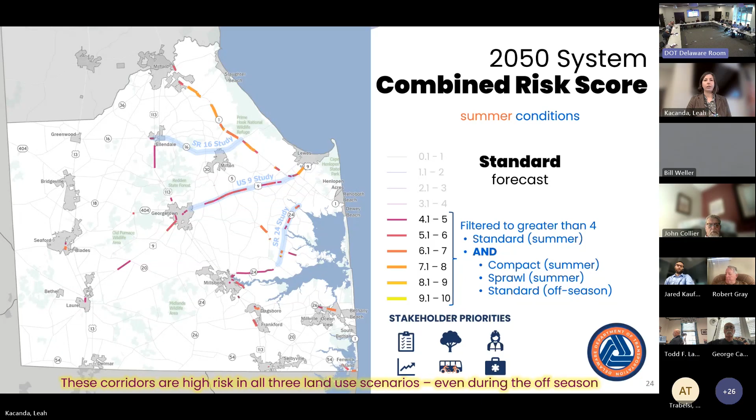So not just congestion. I know when I look at this map, I'm like, oh, that's where traffic is. It's not just congestion. That's just one of 6 measures. It's also the flooding piece, all those other priorities. So we also talked high level about potential solutions for what we can do to address all these risks.

Advancing projects and programs to improve roadway safety, and that is the top priority for the department. We want to increase available transportation options. If someone doesn't have to get in a car to get to their destination, that's one less car contributing to crash risk, contributing to traffic, etc.

We want to expand network connectivity and capacity where appropriate. So how can we better connect our developments and our communities and our neighborhoods with destinations? Having one way in and out of the development isn't a well-connected development, things like that.

We also want to continue our work with Sussex County as they advance the next comprehensive plan, which they intend to get started in 2026, right around the corner, and the land use reform working group recommendations. Our area municipalities, some of you are in the room, and I know a number of you are online, and Delaware Transit Corporation, DART, as well.

So Andrew is going to speak to some of what we heard from you all last time we met. Yeah, so at the last meeting, we had some poll questions, some opportunities for you all to directly engage in some questions that we posed to you. So the first one was, what word or words describe your vision for the regional transportation system? So we have a whole word cloud there. I'm not going to read all of those. You can kind of see what they are.

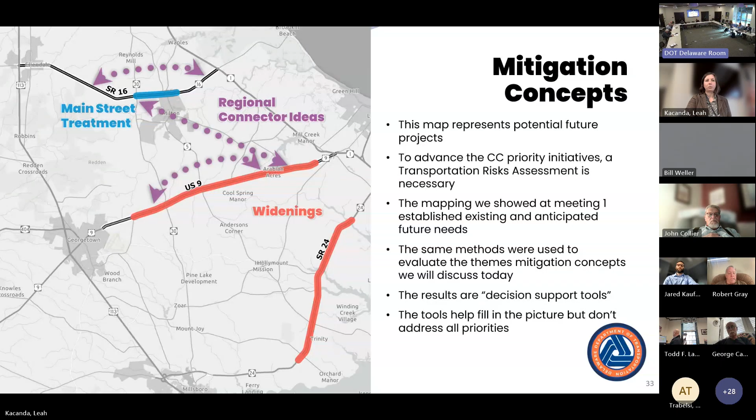And really, the results are informing the highlighted things on this slide. So we're not going to be able to answer questions in all of the potential solutions, but it will directly contribute to a number of them. With that, we are going to transition into our mitigation strategies.

And before we get into the weeds, I love that our presentation features a glossary, right? That's always a good sign. But we did want to make sure everyone understands what we're talking about when we use some of our jargon. So stakeholder priorities. We already spent some time talking about that. That one's pretty straightforward. It's what we heard from you all and your neighbors during our public engagement processes over the past 5+ years. And we use those priorities to guide our scoring methodology and our evaluation measures.

Now, when we say potential solutions, that's the universe of all those P's. It includes policy changes, program changes, partnerships, projects. It's a very broad term. However, when we talk about mitigation concepts, that's when we're talking more about potential infrastructure changes. So mitigation concepts are roadway widening, regional connectors, and main street. And you'll see today, we bundled these ideas into different strategies. We call them blue, red, and green. It's really going to be exciting to see what we came up with.

And for each of those strategies, we score them. So the same way we scored the existing network and the 2050 network last time we met, we will be applying the same criteria to these mitigation concepts to see how they score, because we want to know if they work or not, what they do solve, and how well they potentially work to address the priorities you all have. So again, it all ties back to this chart. The scoring is the same kind of set of criteria.

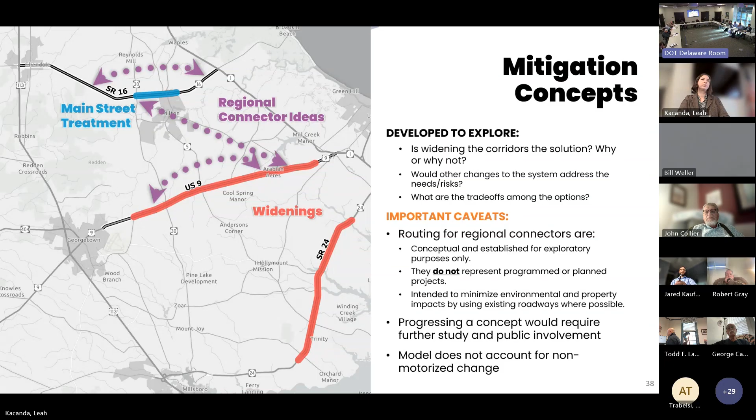See, I can see, for instance, if you knew ahead of time or had a concept ahead of time of the amount of traffic that is traveling, let's say westbound on Route 9, how much of that traffic is going up to Milton, then you can figure out the amount of density that benefits on the rest of Route 9 as it goes west, for instance. It's a really, really good point, and I encourage you to keep all of these ideas in mind as we move forward.

So our lines on the map here, if I could walk you all through the specific ideas we came up with. First and foremost, in blue at the top there, that Main Street treatment in Milton. No surprises there about where that's located or its limits. A lot of meetings have been had about that idea already. And what we wanted to do is make sure that if we do create a more bike and pedestrian friendly environment there, that we're not creating a new problem, a new traffic snarl. So the model helps us make sure that we're not creating a bigger problem than we can solve.

So for that reason, we also wanted to explore some potential connectors in the vicinity. So perhaps less through traffic would choose to drive through what will be more of a downtown environment on 16 through Milton. They could go around on those two northern routes. One of them is a little bit longer, one a little bit shorter. Both are designed to kind of get through traffic around town.

We also show there a southern connector that is labeled 16/9 connector. And that kind of diagonal route reflects something we learned in phase 1 of the study, which is that a lot of the traffic originating towards Ellendale coming in on 16, their end destination is to the southeast down towards the beaches. So a lot of folks right now are already turning right onto 30 to head south and wiggle their way over via a variety of roads towards Lewes and Five Points. So that kind of diagonal gives a little bit of benefit potentially to both 9 and 16.

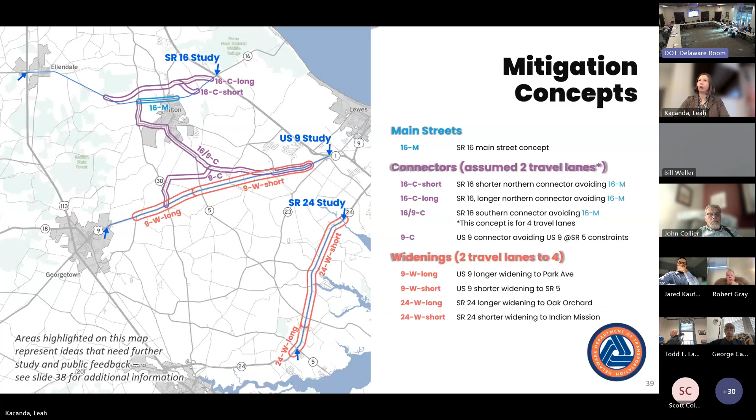One of the other pieces of this is wanting more options and resilient options, such that if one road is totally congested, folks have another outlet. Some of those kind of redundancy principles, which would not be reflected by limited access. But we'll definitely note that, and our team can take a little bit of a deeper look for you. All right, thank you. Okay.

All right. So when we talked about our glossary, I alluded to this. So obviously, we saw quite a number of options, and again, limited resources. I don't think we can build them all, especially when the widenings and the connectors are attempting to address some of the same problems. So what we did was group some of these mitigation concepts into 3 different strategies. Just gave them arbitrary labels of blue, red, and green.

Again, we're not saying that one of these strategies as a whole is going to progress. It's just a tool for evaluation. So again, similarly to our caveat about not a programmed or funded project at all, this package is also not a definitive direction. It just gives us a little bit of a tool to explore things.

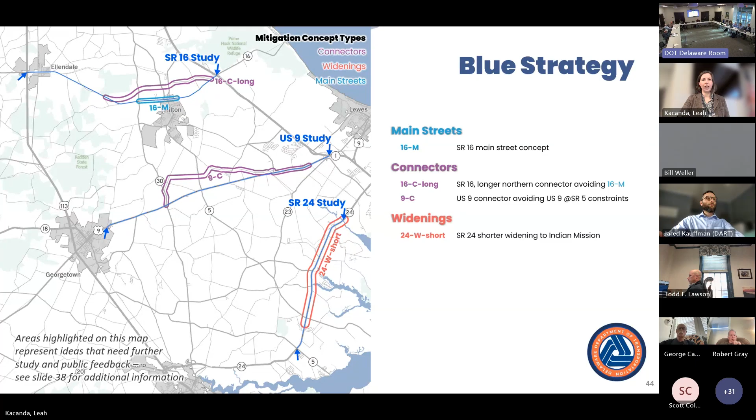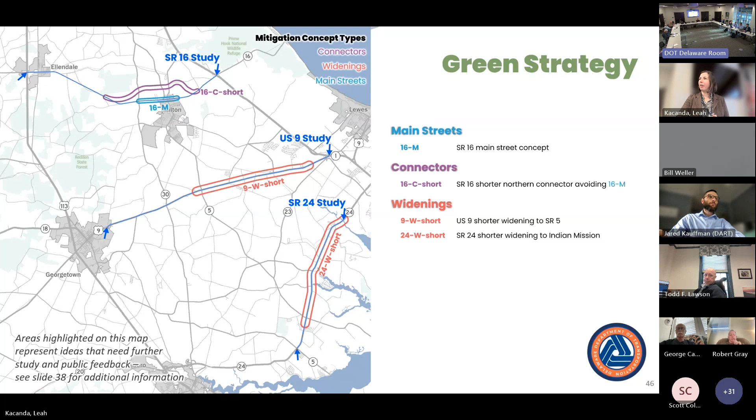And you'll see there on the map that caveat we talked about earlier. Just want to clarify again, these are not funded projects. We're just evaluating. So again, the blue, red, and green. So now we need to understand how they all perform. So for that, I'm going to ask my colleague Ben to join us and walk us through even more maps than last time, I think.

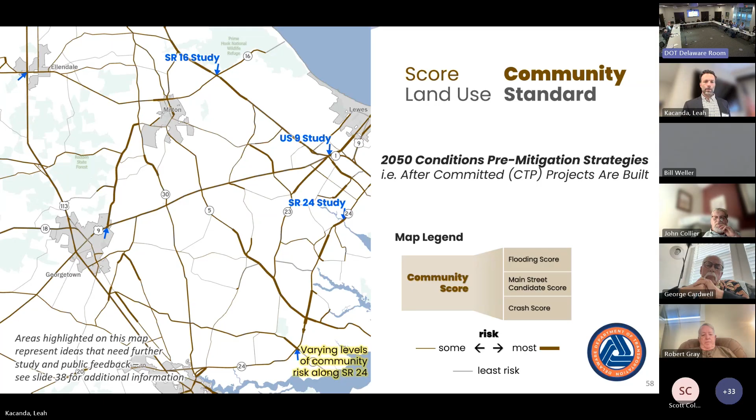We also have just sort of a mid-level, I'd say, across 9 through the study area of risk level on the community front. And then varying levels, sometimes pretty high, sometimes pretty low along the 24. Then when we look at modeling what implementation of these strategies looks like, we're starting with the blue. So again, it's got the Main Street, the couple different connectors, and the shorter widening on 24.

And I'll just point out again, kind of going through the same sequence. We don't see that thick line anymore on 16. So that Main Street treatment is doing its job and decreasing the community risk there. We have on 9 pretty much no change, still that sort of smooth mid-level risk amount. I'll just say on 24 that we don't really see much change at all there either.

Oh, sorry. In this comment too, I'm pointing out the fact that on 9C, you can see a risk level there. It's not huge, but we are actually adding risk where there wasn't risk before by adding a new facility that we're encouraging people to go to. And you could say the same for the 16C long up top. Community risk added, and not much decreasing along the corridors except for that Main Street treatment.

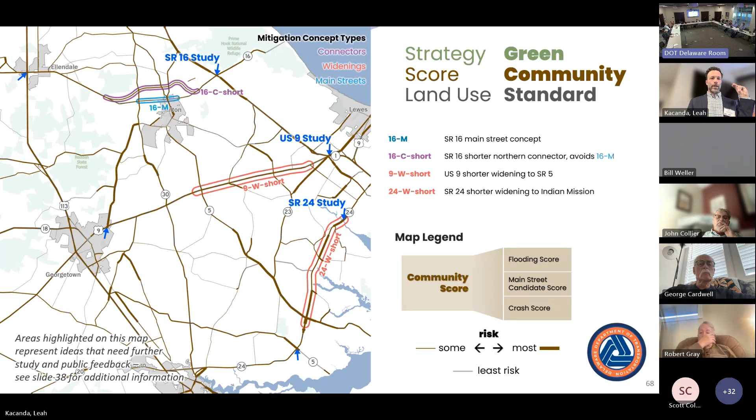Moving into the green, where we've got the shorter northern connector for 16, short widening for 9, and short widening for 24. Here, the effective Main Street concept, no real change on the 9 corridor. We introduced some risk on that northern 16C short route, and we have a little change on the 24 route.

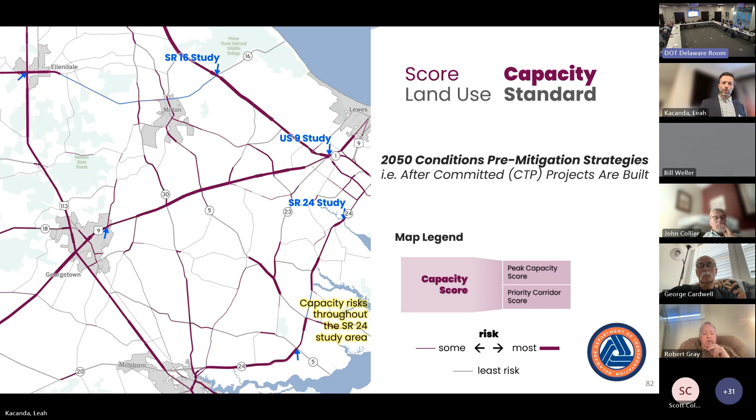Along 9, we certainly have some thicker lines pretty consistently through, starting on the east side where that CTP project widening ends, and then carrying all the way to Park Avenue and maybe finishing a little bit there. The 24 corridor is kind of similar to the community score, highs and lows, but throughout the corridor.

And then applying that blue strategy with these various different concepts for mitigation, we see some improvements to these different corridors on the capacity score. So 16 doesn't change much. A few of the thicker lines on 9 have diminished, and we're getting some capacity issues on the new connector. So again, sort of introducing risk where it wasn't before, but that could be something that you could even explore going from 2 lanes to 4 lanes, like we did on the diagonal one. But we're seeing that it does pull capacity concerns from 9 to some extent.

And I'll just say too, and this gets to Dick's comment or question before, is that even on facilities that we're not directly talking about, like 9 or these connector routes, leading to this connector route we see on 30, this section gets wider for capacity concerns, because now that this is an attractive route, people that took a different route before may be heading toward or out of that connector route on 30 and creating capacity risk that was smaller before in certain spots. So it's a little bit of that whack-a-mole effect.

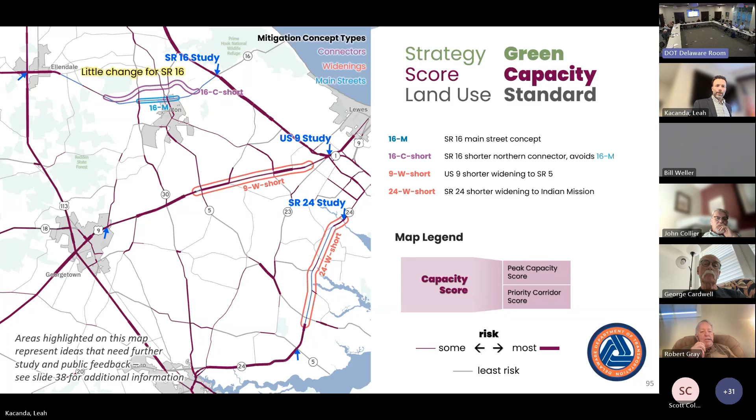And then green, this is more focused on the 2 widenings on the 2 lower routes. 16 doesn't change. Again, this is the one that reduces risk on 9 the most, the widening of 9. And we don't have the increase that those connector strategies introduced. And finally, the widening on 24 is effective.

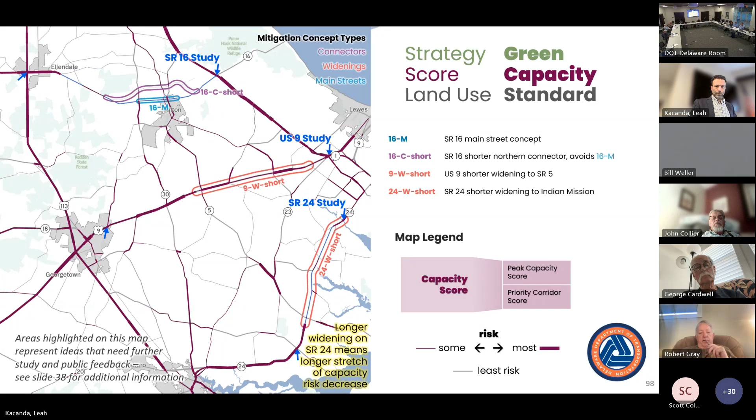So again, green and blue are showing some promise as strategies for capacity risk reduction. We've got the Main Street is effective, it's not increasing capacity risks, so that's good. And I will say that we did once do a preliminary run on 16 without any connector routes that would take through traffic around it, and that maybe worsened a little bit on the capacity end, but not very significantly at all. Yeah, so essentially you would not have to pair the Main Street improvements on 16 with a parallel route. From a resource perspective, good news. Yes. And potentially community risk, I think, would be lessened by not going that route.

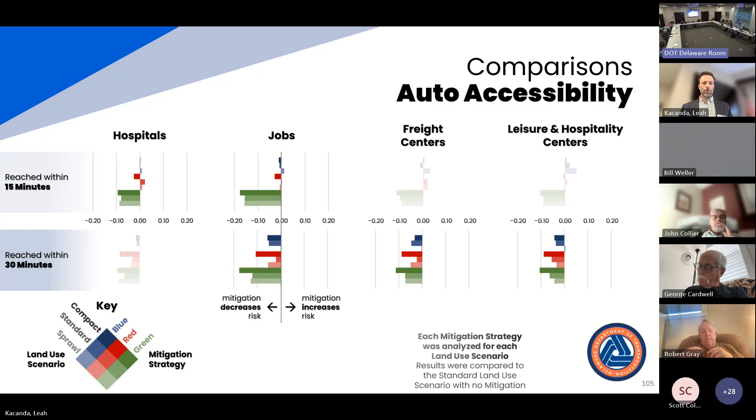Similarly, too, if there's not a lot to get through in between some of the longer ones, then your trips are going to be shorter time. So that works well together. This is essentially what I'd say about compact and accessibility. Green seems to win out pretty well there.

I think it's time for another poll. Okay, great. So there's a couple questions here. The first one is, how close do you live to your job during typical traffic conditions? If you're no longer working, maybe just how near you used to live to your job during typical traffic conditions. Just trying to get a sense of within 15 minutes, within 30 minutes, or longer than 30 minutes.

If I walk to my job, how long do you think? 10 minutes. Nice. That would be within 15 minutes. Okay, so kind of a pretty even split here. Well, there we go. I don't know where that other 1% is, but you know.

All right, well, what I've seen, that seems to stack up with wider data on where people travel. People tolerate driving longer distances for work than they do for going to the grocery store. Yeah. So again, pretty even split. We just had one more response, which threw it off a little bit, but pretty even.

And then our next question, how often does traffic increase the time it takes for you to commute to and from work? So how much is your commute affected by traffic? Never? I want to know who that person is. Rarely, so a few times a month, occasionally, at least once a week, frequently, multiple times a week. So as we heard in the room, we do have a walker, so that's maybe where the never comes from, if you're walking or biking.

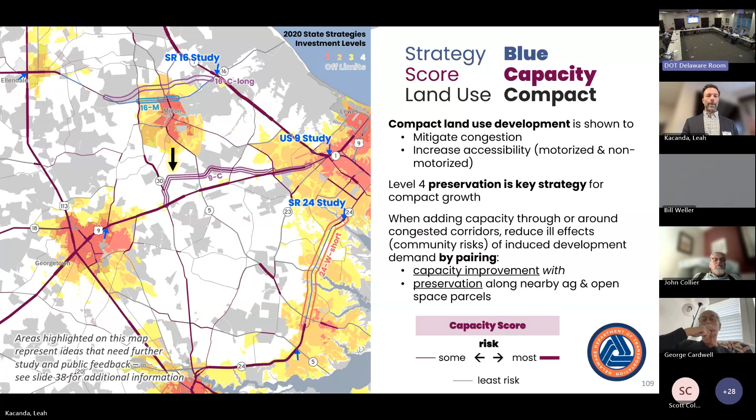And I think that generally there, the concept is to try to get on the other side of 30, to the other side of 5 in any of those, and avoid that Main Street area. But yeah, I think it shows how, if it were to happen, people would probably be upset at it. And that's partly why we're seeing added community risk in that scoring, is that we are acknowledging that it's not without controversy, not without trade-offs, et cetera. And it's just a concept to explore what happens. I think that was it for that piece.

Just on the takeaways here again, the green strategy was strong on the accessibility. The compact really showed consistently as an improver of auto accessibility. I will say that it's known to be an improver of non-motorized accessibility as well. It's not something we're looking at in this analysis. And then probably a good look at level 4 areas and preservation pairing with capacity concepts would be

So cost is the final analysis or metric that we looked at. And here the map on the left just shows everything that we had as candidates. I will point out, you may have noticed that only one of these didn't get into one of the three scenarios, the longer of the routes on 9. That was largely due to the fact that it was the longest widening and most expensive. And we just wanted to keep these to be potential concepts that are a little bit more on the affordable end,

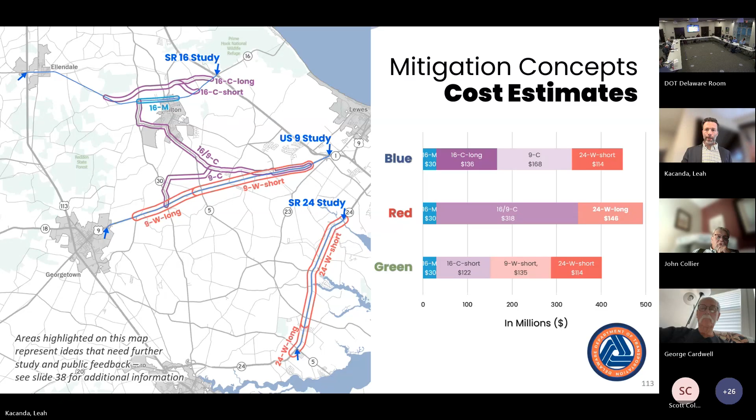Sure. Even if we say green is the least costly and it's good for this accessibility or that other measure, it's not something we're saying, okay, let's do these 3 things at all. Nothing needs to go forward that keeps those 3 intact. Mm-hmm. But thanks, George. Okay, thanks. Yeah, and that's part of why all these maps too, remember, this isn't as if these were built tomorrow.

This is looking at 2050. So right, we're baking into the analysis the knowledge that it's going to take time. And for those of you who have been around a long time, Andrew, I'm looking at you. Andrew, I always call on you for this. When did the 113 study get done? Well, it started in 2003, and I think we probably had our final approvals in '08 or somewhere around there. Planning in '03, approvals in '08, and when are 113 improvements getting constructed? Right now, and some of them are still even ongoing. So it's a decades-long process here, and we are at the front end of

that process. But the need isn't manifesting yet. One could look at that and go, gosh, why does it take so long? The flip side of looking at it is you plan so that you can preserve the space for when you're ready and you have the funding. If you just wait till you have funding, or if you wait until there's the absolute need, you may have lost all of your options to actually do the work that you want to do. So getting it planned early so that you can preserve space is really the key ingredient to being able to then move forward. The state of Maryland preserved that farmland on 404 in the 60s. Yeah, before they expanded it, you would drive down and see where the telephone poles were, and they were way off the roadway.